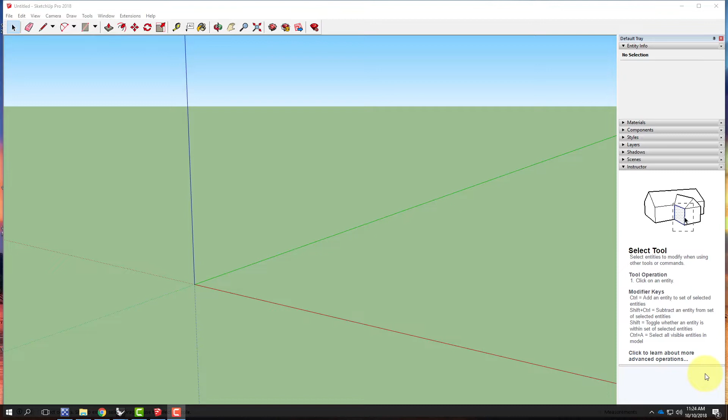Once again, I started out in SketchUp, and I'm going to go to the File menu, then Geolocation, Add Location.

I'll zoom in on Mount Diablo here, say Select Region, and then grab the region. I can confirm it works by going to File, Geolocation, Show Terrain, and that gives me the piece of terrain to work with.

I'll go to File, then Save As. Remember, I have to go back to SketchUp 2013 in order to bring it into Rhino, so I'll save it in that format and put it into today's folder. This is Mount Diablo.

At this point, I'm going to move over into Rhino and open this up. I'm going to go to New and use Large Object Inches as my template. I want to make sure the templates match up and that I'm using inches, because the file I'm getting from SketchUp is also in inches, so the units will match, which is important.

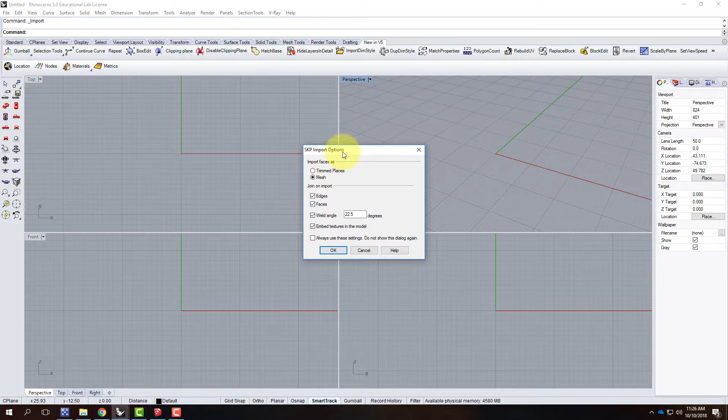So I have my new Rhino file. Inside Rhino, I'll go to the File menu and say Import, and bring in that file I just saved. There's Mount Diablo, we'll bring that in. Default options for the SketchUp import are fine, we'll say OK, and there it is.

Zooming out in the perspective view, there's that piece of terrain I brought in. Remember, this is a mesh, not a NURBS surface, so we're going to convert this into a NURBS surface.

Let me clean up my layer structure first. We can get rid of the flat plane, we don't need that. This we'll put on a brand new layer called SketchUp. I'll right-click and say Change Object Layer. All the rest of these layers can go away, so we'll delete those, leaving just the SketchUp layer and the default layer for now.

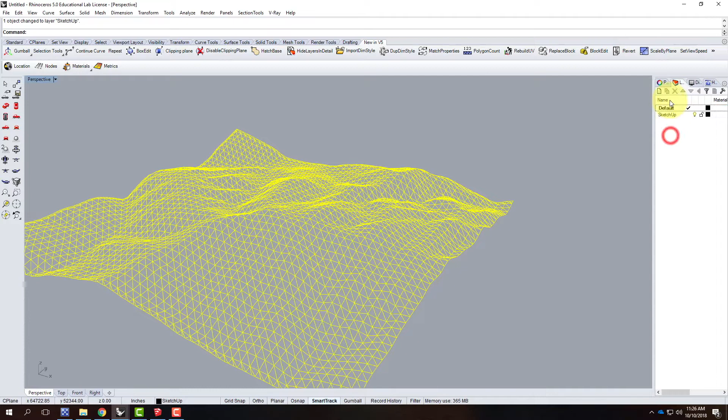Let's view this in shaded mode so we can see that it's a surface. Yep, there it is. I'm going to create a new layer called Contour X and make that the active layer.

I'm now going to use the contour command to make a bunch of parallel lines across this surface. I'll go to Curve, Curve from Objects, Contour, or alternatively just type Contour. My contour base point needs to be one of the corners. Since I have trouble selecting it, I'll turn on Object Snap and Vertex Snap to get to one of the corners. There it is. I want to make sure I go off in space without snapping to anything, so I'll turn Ortho on and go off in the negative X direction, though the direction doesn't make a difference.

The distance between the contours I'm going to set at 100 feet, and I'll press Enter. There that is.

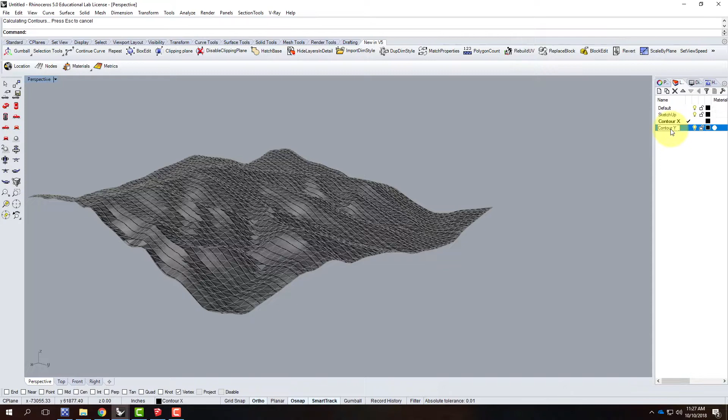I'll deselect everything and repeat the contours, this time on a layer called Contour Y, which I'll make the active layer. Again, I'm going to contour the mesh, not the curves, since contouring the curves would just give me points, which I don't want. So we'll go to Curve, Curve from Objects, Contour, using that same corner as the base point, going off in the negative y direction, again at 100 feet.

And there's my next set of contours. At this point, I can turn off my SketchUp mesh, and I'm left with just the curves that will represent this surface.

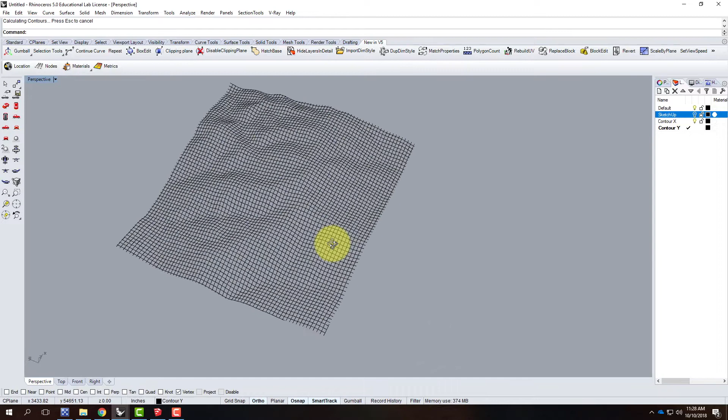From here, I'm going to switch over into the top view, zoom out, and trim off the ragged edges. So let me take a few of these curves, and we'll go to trim.

And there we go, so I don't have any ragged edges around. That's good. Now I can go ahead and make my curve network out of this.

I'll move back into the perspective view and select all of my curves. Actually, let me make a new layer first, and we'll call this terrain. I'll make that active, and then I'll go into my surface curve network.

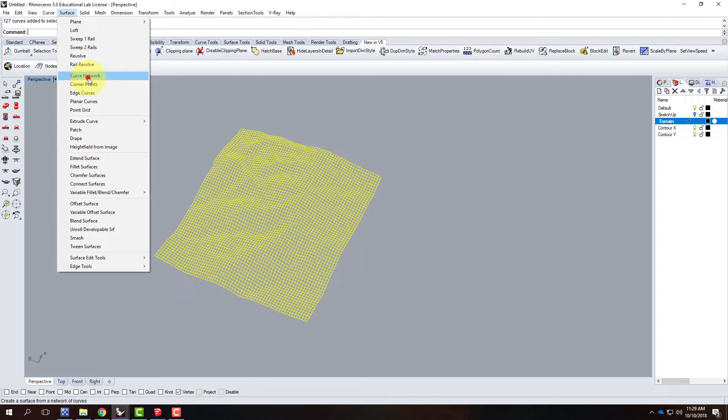Or I could type in NetworkSrf, which is the command line for it. If I did this correctly, I'll get A, B, C, and D on the four corners, or on the four sides of this. The default options are just fine, and I'll go ahead and say OK.

This does take a few minutes, or it can take a few minutes, so we'll be patient while it's working on it. It frequently looks like it's going to crash, so that's not a problem.

While it's there, I'm going to go ahead and flip over and bring up the little cheat sheet that you guys all have in front of you, just so that I have an example of it in front of me.

Actually, you know what? Let me open it in Photoshop. Hopefully I still have it on my flash drive from last class.

Bear with me for just a second while we get this.

Oh, it doesn't look like I saved it. Well, we'll have to look at it not in Photoshop, we'll have to look at it online. So sorry about that. Let's open this back up and go to today's exercise.

And apparently I have to go to—there we go. There's the table. So we'll come back to this table in just a second. Let's see how Rhino is doing for us.

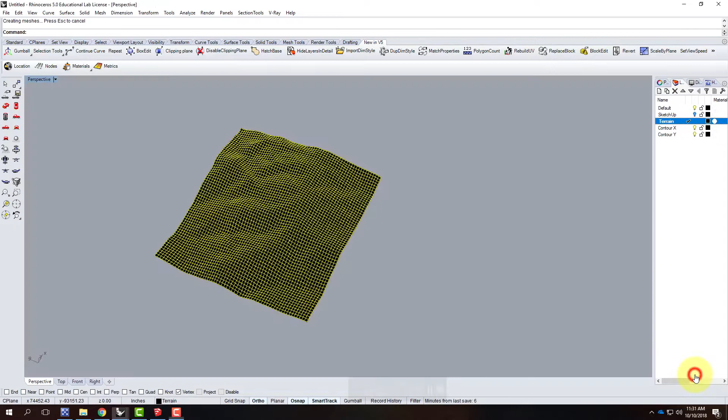All right, so it did finish. That's good. Now that it's finished the surface, remember it's going to be super dense, so I'm going to have to rebuild the surface. I'll click off so that nothing's selected, and this process takes a while. It's very slow. Then I'll click on the surface itself and wait.

It highlights that big block of yellow. At that point, I can type rebuild, or I can go to the edit menu and select rebuild, and I'll wait. By the way, it's faster if you have just one view showing instead of all four when you try to select it.

When I do the rebuild, I'm going to do it at 100 by 100, and I'll go ahead and say OK.

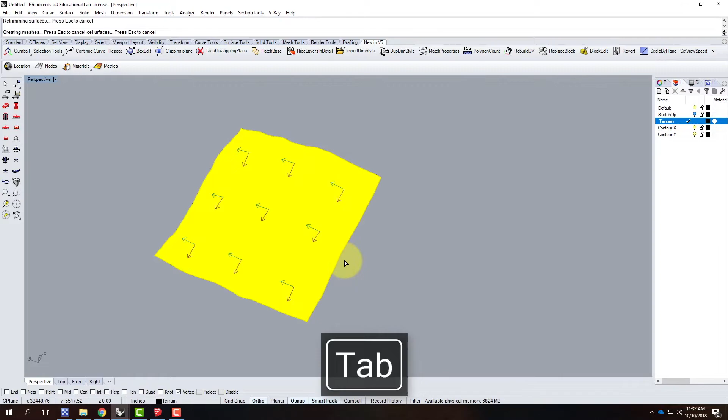Much better. Now I can actually work with the surface itself. I'll turn off my contour X and contour Y, and now I'm left with the surface itself. Let me zoom selected so that it's easy to see. And there it is.

So that concluded the first day. That was 211, now I'm moving on to 212. So 211, I managed to do it in all of 9 minutes and 30 seconds, and that was the first day. So you see how this compresses down. The next day I can compress that down too, and we'll get to the last day.

Like I said, all in all, I think it would probably take me about an hour to go from the SketchUp all the way through laser cutting and having it built. Maybe an hour and a half. So the process gets a lot faster as you work through it.

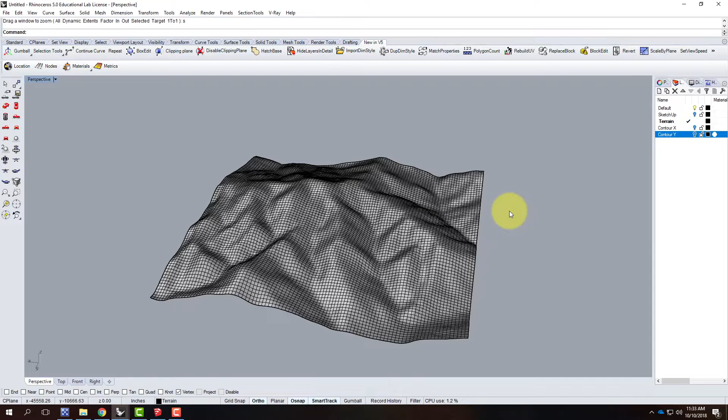So now I have my terrain. Now I need to go back and double check that little chart that I brought up here. And I needed to select, number one, what the drawing scale is, or what the model scale ultimately is going to be. And last time we did 1 to 250, which worked out okay for the size of our terrain.

If you were working on a specific site, you'd probably be down here in the architectural side of things. You could pick one of those scales—the same strategy applies. My guess is we're going to work somewhere for this class between 1 to 500 and 1 to 200. I think almost everybody that I went around and helped last class was at the 1 to 250, the same example that I was working with.

At 1 to 250 scale, if I wanted my model to be 11 inches by 17 inches, I would get an overall size in inches of 4,250 inches by 2,750 inches. So I need to go back to my Rhino model and draw a rectangle that is 4,250 inches by 2,750 inches.

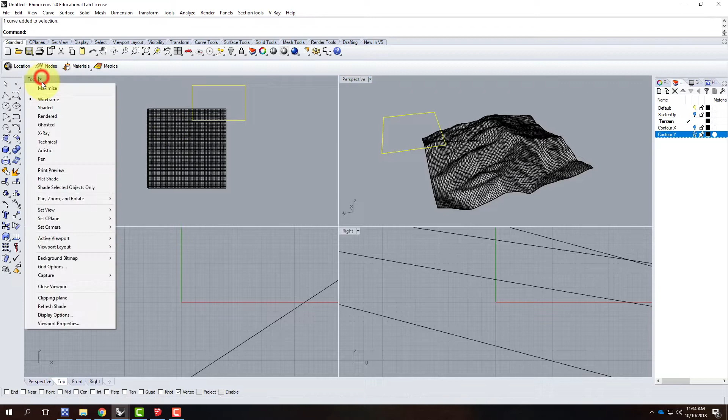I'll hit enter to finish, and there's my rectangle. Obviously that rectangle is hanging over the side of my terrain a little bit, so I want to move it. I'll go back into shaded mode so I can see this. Some people like rendered mode because you can see the terrain more and discern where you want your rectangle to fall. Let's say it's right about there.

At this point, I need my rectangle not to be flat, but to follow along with the surface so I can use it as a trim. In the top view, I'll use the project command. I'll select my rectangle as my curve, press enter, then select the surface to project onto and hit enter. Once I've done that, it nicely follows along with my surface. Now I can use that curve as a trim.

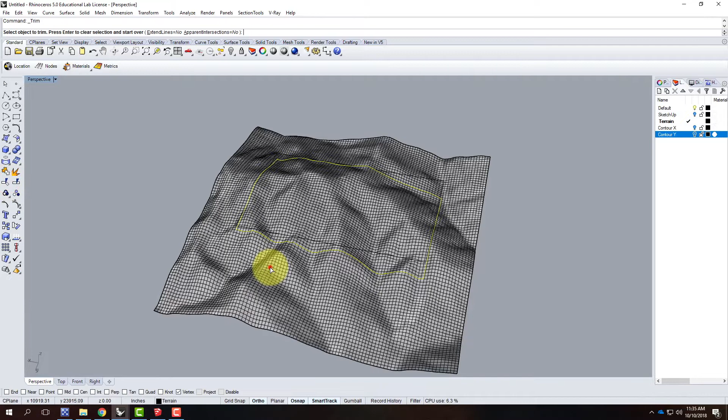I'll click on the trim button and get rid of the rest of that surface. I'll hit enter to finish. Now the piece of terrain I have left is at 1 to 250 scale, 11 by 17 inches. That's perfect, that's what I wanted to have happen, and I have the terrain ready.

Now I need to think about slicing this terrain up as if it were slices of cardboard. So I need to know what the thickness of my material in the final model is going to be in order to actually create this.

I'll go back to that chart I had, right here, and depending on the material I'm going to pick one of these columns. For our purposes, the cardboard is a little thicker than 1/8 of an inch, so it's 5/32. I'll find out what my contour interval is going to be. It's 39.063 inches, and that represents the thickness of the cardboard in my final model. So I'll use that number, 39.063, when I cut this next round of contours.

I'll add another layer and call it Contour Z, or Topo Lines, or anything like that. I'll make it active, go up to my Curve menu, Curve from Objects, Contour. Select objects for contours - it's that surface. I'll press enter. Contour base point - we'll pick one of the corners. It's no longer snapping to the corners because it's not a mesh, so we can turn on Endpoint Snap instead.

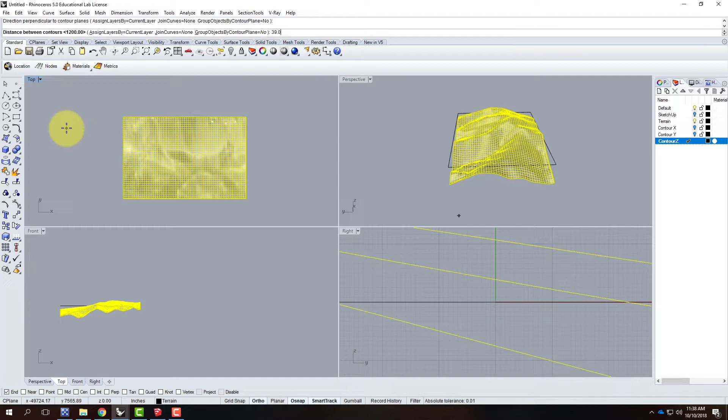I'll start at one of the corners, and I need to go straight up and down, but it's not letting me do it in this view. So I'll move myself into one of the side views here, and there we go, making sure I can go straight up and down. There it is. Now the distance between the contours - this is that value I got from the chart, 39.063. I'll type in 39.063 inches and press enter.

And it will then slice up my piece of terrain quite nicely. Remember, each of those contours is the thickness of the cardboard of the final model - that's how I determined what these contours are going to be. To confirm they were done correctly, I can look in one of the side views and make sure they're perfectly horizontal lines, which they are. I could also look in this other side view and see they're perfectly horizontal lines, so that's what I'm looking for.

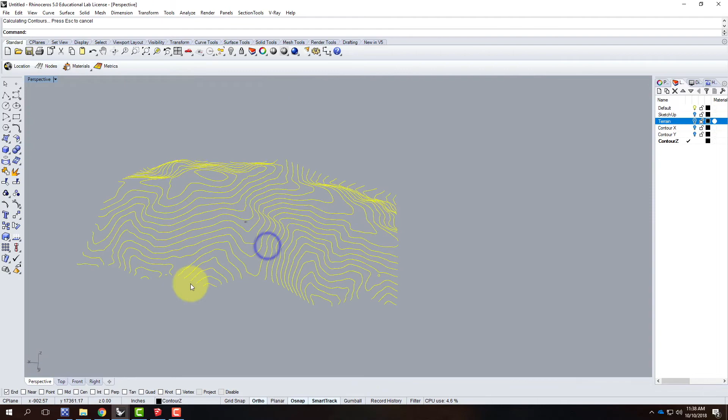At this point we can turn off the terrain altogether and look at our curves here. Now we were going to draw the steps on the sides, and I showed you there were two different methods for drawing the steps. I'll go through both of those methods again today. The first was to install a bunch of points along the edge here.

To do that, I went into the points, and instead of doing a single point, I'm going to right-click on the button instead of left-click, which will let me do multiple points. I should also create a new layer for this.

Put it down here at the bottom, and let me rename that points. Or let's go side 1. There we go, that's the current layer.

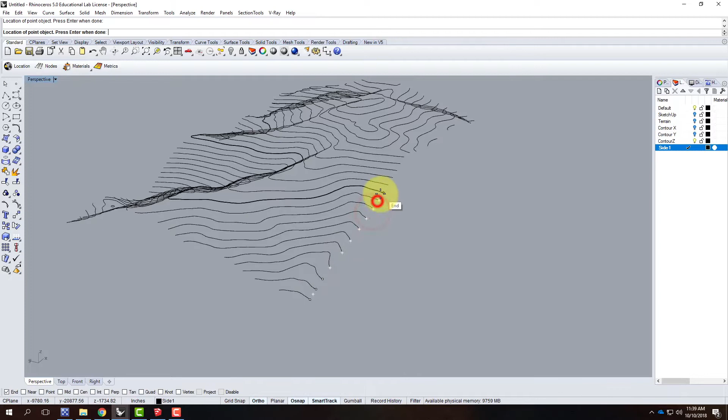I'll right-click on the points here so I can start working on my points all the way up the side. I'll click one on each end. I only have end snap turned on, definitely not near snap, because that would get me messed up. I'll work my way along all of the end points like that, and press enter when I'm done.

Now conveniently, these are all on a layer, so all I have to do is right-click on the layer and say select objects, and there's all my points. If they weren't, I could use the command selpt, for select point, to get those points. That's another way of doing it.

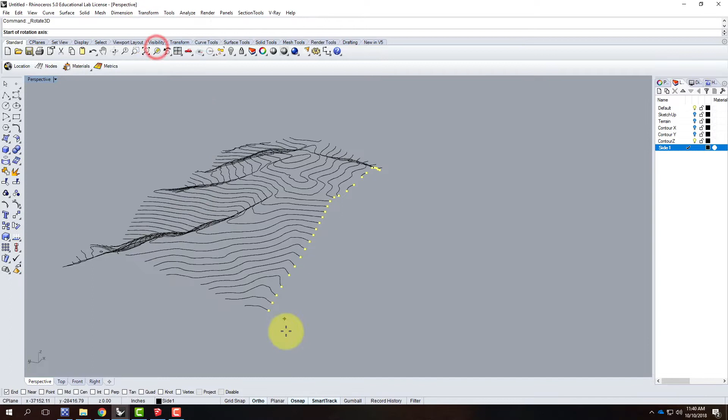Now I need to rotate them to be flat, so I'll use Rotate 3D. I'll go up to Transform, Rotate 3D, start at the first point in the line here. Again, we'll go off in space - this is going along the x-axis right there. And we'll go from straight up and down and fold it down to the side.

At this point I can go ahead and draw the steps, so I'll start with my Polyline tool, starting on the first point. I do need to turn on point snap here - there it is - and I'm going to turn on perpendicular.

I'll come over and use my smart tracking, hovering on the first point, coming back until I get perpendicular. Oops, helps if I actually snap there. Hover, snap back to perpendicular. Hover, snap back to perpendicular.

And I'll work my way up this side. When I get to the top of a hill, I go straight across, and then I start working my way back down the other side. So here I get to the bottom of a valley. At that point, I need to go down my distance of my contour, so 39.063 feet.

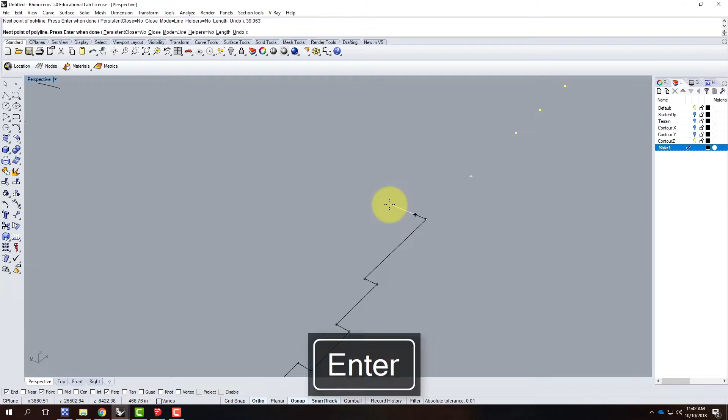Over, and back up - that's the top of a hill. This is now the bottom of the hill, 39.063, or the bottom of a valley. We'll go over, we'll go across, and then we can start our steps going down the other side.

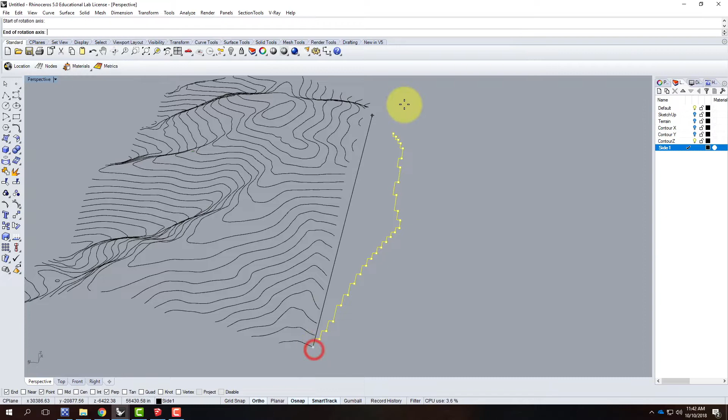All right, once I'm done, I can select my steps and all the points and rotate 3D back. So I'll go to Transform, Rotate 3D, go off in the X direction again, and take it from flat and move it up to be vertical. If I did it correctly, all the steps should line up, which they do. And if I looked at this in one of the side views, all of my vertical steps are in fact vertical, which is good.

So the alternative method to that - there's nothing wrong with that method, but it can take a little bit of time - is to work with what's called our CPlane, our drawing plane. I'm going to adjust the CPlane, so rather than being in the X and Y direction, rather than being flat, I'll adjust it so it's vertical along this edge. I'll do that by clicking on the triangle next to where it says perspective in my viewport, and go to Set CPlane, 3 points.

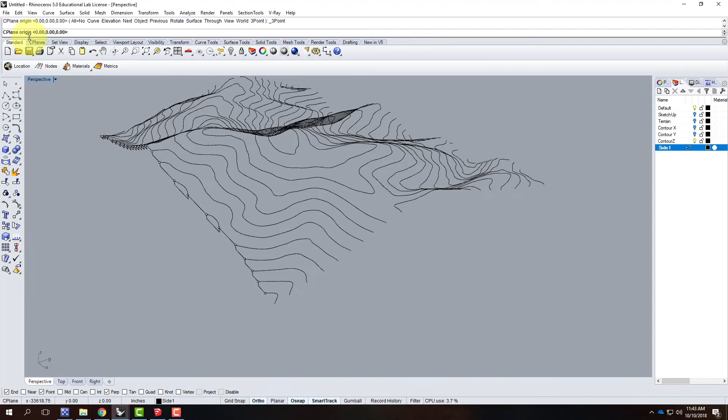CPlane origin is going to be the first point in this row here - although I don't know for sure that that's actually in the corner, so it may be this point - so I'll do the second point there. I'm going to make sure I'm going off into space along axis, there it is. Then I'll switch my view so I'm going straight up and down, like that. If I did it correctly, I should see my little grid showing up right there, and it should look like it's in plane with what I'm creating, which it is.

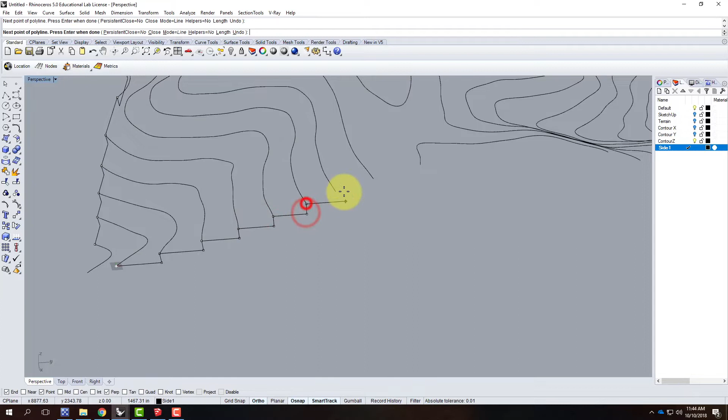At that point I can go ahead and start at this first point and move my way, snapping to perpendicular and creating these stair steps as they go up this side. So this saves the rotation, and you're drawing right in plane with all of your objects. I'm at the top of the hill, I go straight across, and I continue going back down the other side.

All right, so I've got that side done. I need to switch over to do this side. I'll go back to my set CPlane, and go back to world top, which resets it to the original CPlane.

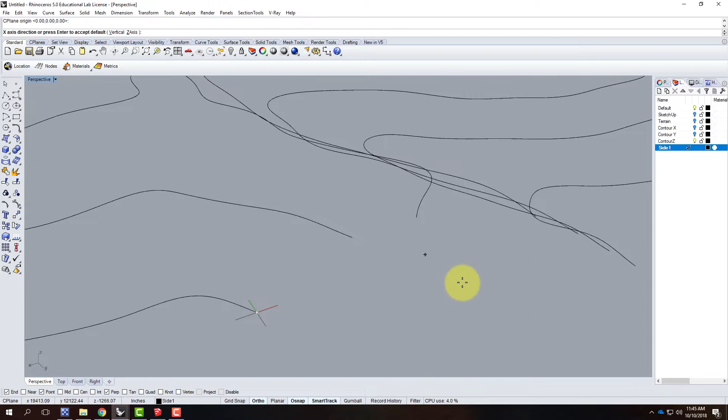Then I'll go to set CPlane 3 points. I'll start at this point this time, going off in space along the x-axis. Then we need to go vertical, so I'll switch views. My little grid shows up right there.

I can start right from that point, go up, across, and then back down. This front side has a lot of undulations in it, so I'm going to be going up and down fairly frequently.

Now there will be some times where you guys made a mistake, so I'm going to deliberately make one here. This should go down the thickness of a contour, but I didn't do it, so I'll go straight across and keep going. I'll show you how I would come back and fix that later on.

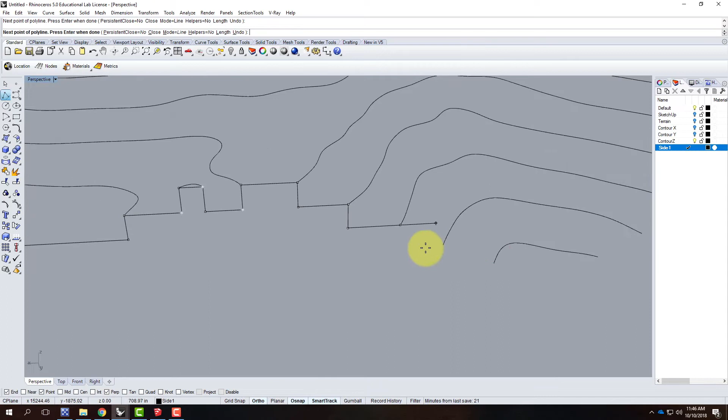I'm going to go down 39.063 feet, and then we'll go back up this side.

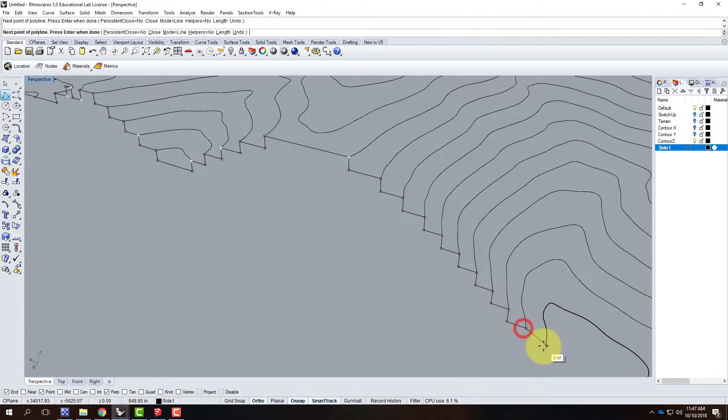Sorry, I know this gets tedious watching me do it, but I have to do it so that I can get done with this so we can move on. So 39.063 feet, we'll go across like that, and I'll work my way back up this side.

Straight across because I'm at the top of the hill, and I'll end right there. OK, one more side to go.

I'm going to do that CPlane one more time. So I'll go back to my triangle, go to Set CPlane, World Top, then back to my triangle, Set CPlane 3 points.

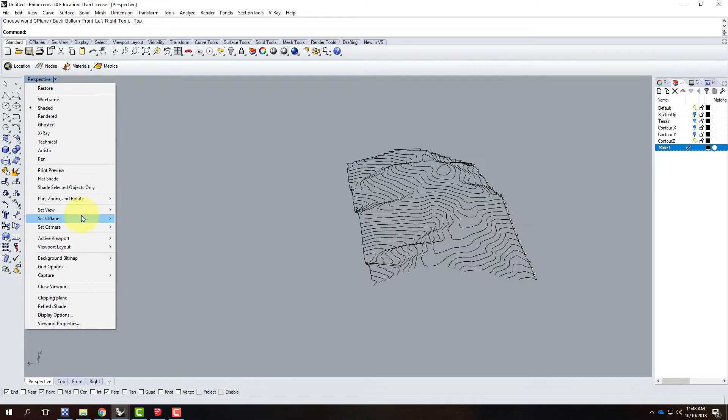And we'll go off. There we go, and we'll go up vertical. Then I need to do one more round of stairs, so we'll work our way up this side.

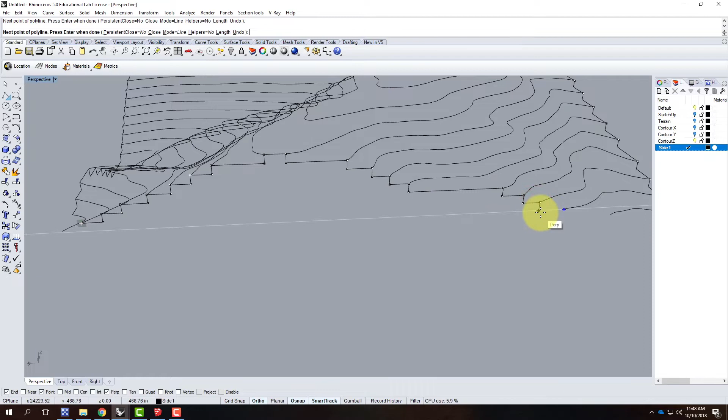All right, so at this point I have all the sides complete. But just like you did, I left the ends of the sides, or the corners of the sides, incomplete. So this just got me to the end of last class. We did the first class in 8 or 9 minutes or whatever it was. This one took a little bit longer, about 15 to 20 minutes for me to do. So now it's time to move on and continue from where we left off.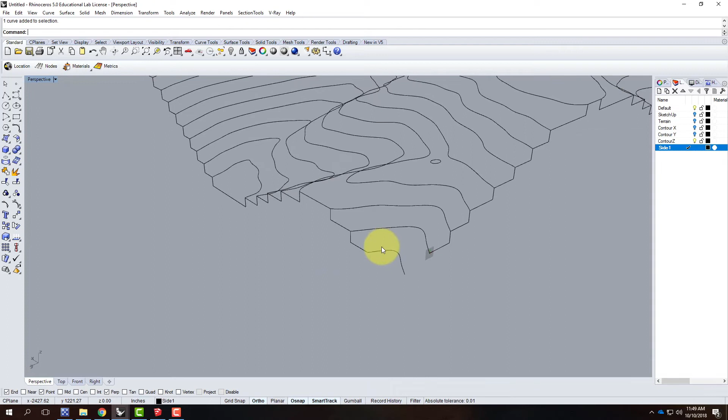The first thing I want to talk through right now is how do we make these corners actually work? The reason I left the corners blank for now was because we need to reconsider what's happening in the corners. So at this example here, this is the last contour on this side.

I should go down, over, and back up to that point. Likewise, this should come down and over. I don't know for sure, though, looking at this, that this point is exactly in the corner. It might be, but it might not be.

So what I'm going to do as I get closer is start with this, and I'll go down 39.063 feet, because we know I need to go down. Then I'll go off in space, and you can see right there that it doesn't actually match up. It passes by that edge.

So if I had gone down and then over, my step would be out of plane. So I just go down and then leave it long. On this side, I'll go down 39.063 feet.

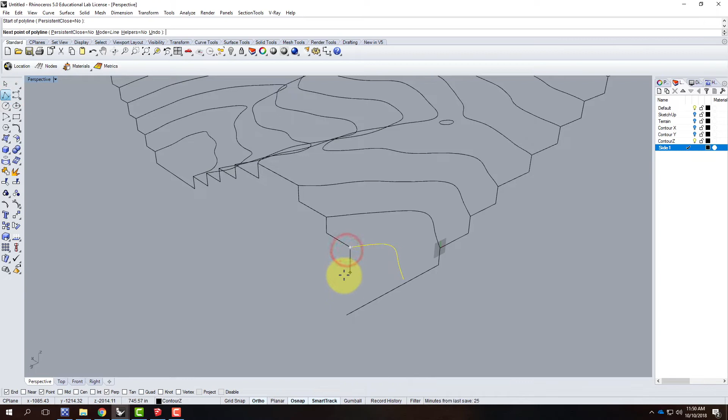Now I can't draw this direction anymore because my CPlane is over here, so I'll have to use some snaps and see if I can get it to work. There it is, and we'll go back up. Then I'll leave this one long, and I can basically come over and snap to perpendicular.

So that's how the corner came together here, but it's going to vary on each corner. So I'll use this as a trim, and I'll trim off that piece there. So this piece and that piece should be joined together.

So I'll go ahead and type join. Likewise, this piece and that piece should be joined together, and I'll type join. So that corner was done correctly now.

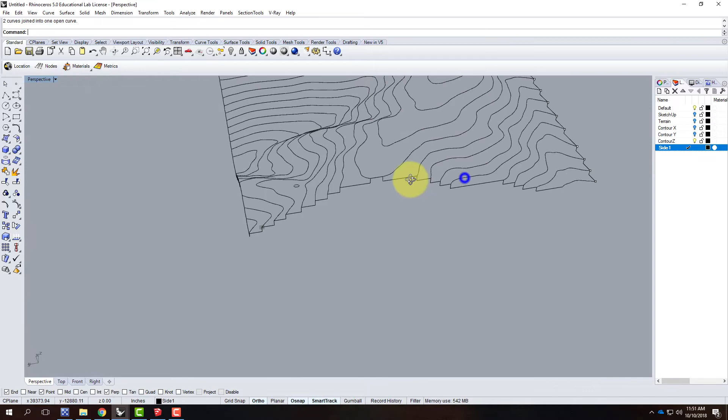I'll work my way along, and this is also one of the things that I do is I go along and check to make sure all of my steps look like they match up as I move from one side to the other. OK, so now at this point, from here, we need to go down 39.063 feet.

And we need to go off in space that direction. Likewise, from this point, we need to go down 39.063 feet, like that. Now I'm betting that those actually, on this one, ended up right on top of each other. It happens, so let's see. I'll use a trim and see if I can trim that off.

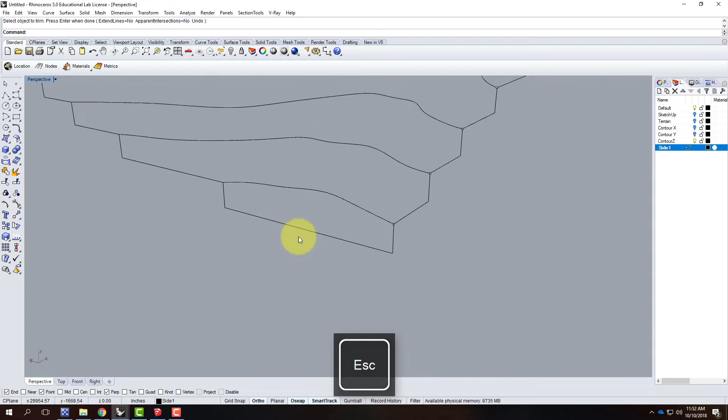There it is, and that did work that way. So in this case, this curve here ties into that curve, and this curve and that curve tie together. So I'll type join and work my way along this side.

All of that looks pretty good. This goes down and back up. Truth be told, along this, these little tiny curves, these little scoops, are going to get lost and burned up in the laser cutter, so they're not that useful, but I'll leave them for right now.

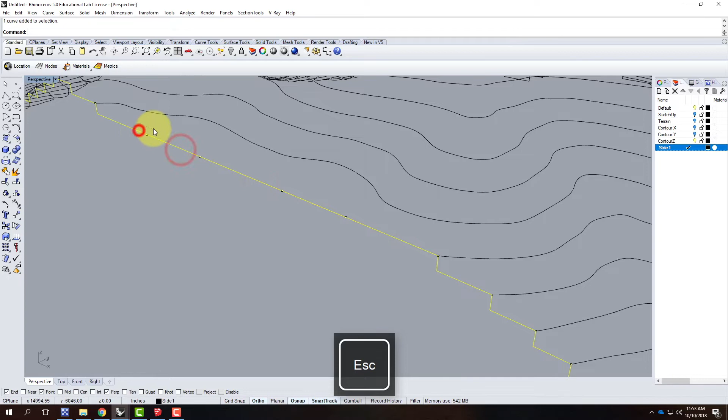Sometimes if you have ones like that and you want to just skip it and go all the way across, I'm okay with that. Essentially all I would do is delete this, then draw a line from here to here, and another line from here to there. Then I need to do some trimming. I'd type trim, get rid of that and that, and then take these segments here and join them back together.

So if you end up with some really funny little piece along the way, you can feel free to delete it. A piece like this is plenty big enough to glue in.

Okay, so let me adjust this corner now. We'll come back, I'll go down by 39.063 feet. There it is. And I can't seem to go off from here because my CPlane isn't in the correct direction anymore, so we'll just leave it. I'll come back to this one and go down 39.063 feet.

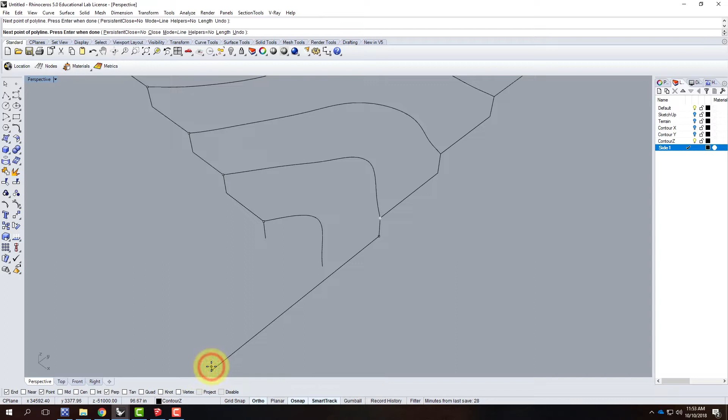And now I'll go off with that point. This then would connect perpendicular to there. I could go from this corner down 39.063 feet and snap to that point there.

So there's that corner. I'll go ahead and type trim. Oops, sorry, let's try trim one more time. Trim, there we go.

And now I need to join these up, so I'll hold down Shift, select those, and then Edit, Join, or I can type join. Same thing, this piece and that need to join together as well. So this, I'm checking along the way. That all looks pretty good. I get to my last corner here.

And so I could start right here. This would go down 39.063 feet. But I can't go off in this direction just yet, so I'll just finish it there. I'll start at this point and go down 39.063 feet, and this one I can go off in that direction.

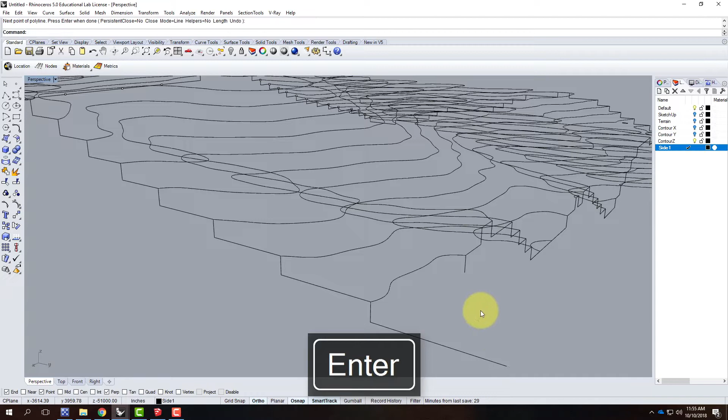And now that I have that curve, I can snap from this perpendicular to there to create that piece of the curve. We'll use this as a trim for that corner there. This joins to this, and this and that join together as well.

So as I was creating this, I told you I was going to make a mistake on purpose. I didn't go down here, I went straight across. So this is one of those places where I'm going to have to fix it.

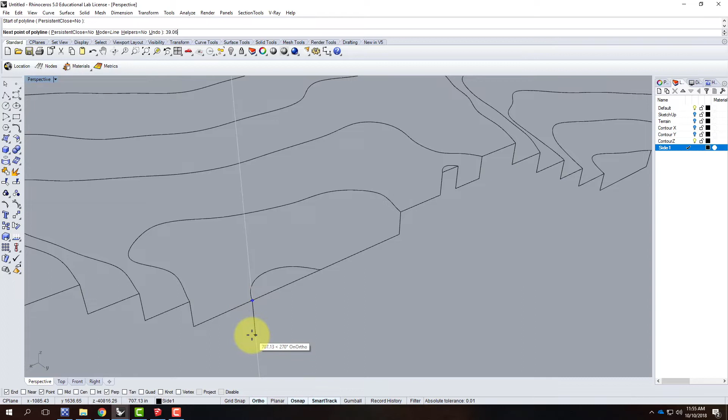So once again, I could go to my Polyline tool. I'll go down 39.063 feet. I can't go over just yet, so I'll finish the command and press enter. I'll go back to my Polyline tool, and I'll go down once again 39.063 feet. And now I could snap those two pieces together.

I could even join those pieces together. Join. I could use this as a trim to trim that piece out, and then I could select this piece and join those back together.

Sometimes you have a piece where you kind of messed up a little bit. Trying to help you guys solve problems. Sometimes you have something like that happened. I made a mistake, but it's all joined together. How do I fix it?

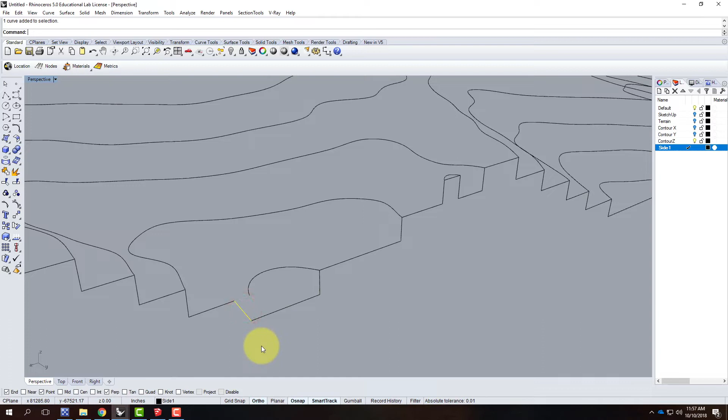In that case, the strategy would be to explode. So I can go up to Edit, Explode, or just type Explode. Deselect, I'll hold down Control, deselect that piece while everything else is still selected. While they're all still selected, go back and join, go to Edit, and then Join. That keeps this and this still connected together, but gives you access to that one piece, which you can then delete. I can then go through and fix that problem there and join those back together. So the strategy there was just to explode, then select the piece that you don't want, and delete that piece.

Okay, so now I have all the sides all the way around my object. At this point, I have to make these sides into pieces that can be cut out on the laser cutter, and so I'm going to construct the sides.

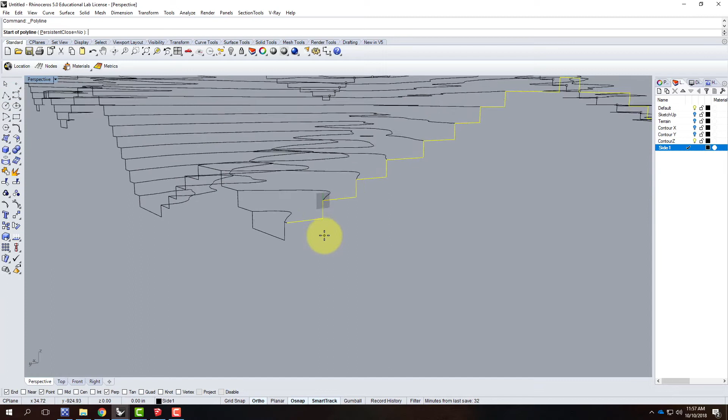I'll start with this side here. Basically, a piece of cardboard that goes down further than whatever my lowest point would be. So let me start right here with my Polyline tool. I'm still in Ortho from earlier today. I'll start on that corner. I need to go down, making sure I'm lower than whatever the lowest point is. My lowest point is right there, so I just need to make sure I'm below it. It doesn't matter how far down it is.

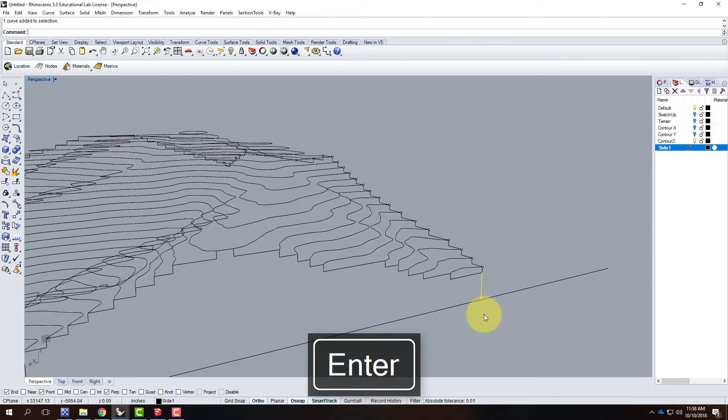We'll put it down there, that's fine. Now I can come across and just leave it long. Then I can come to the other end, right there. I can go down and snap to perpendicular to create this side. I can then use a trim and get rid of that. So that piece plus this piece all end up being one side. Let me go ahead and join those together. There's my first side.

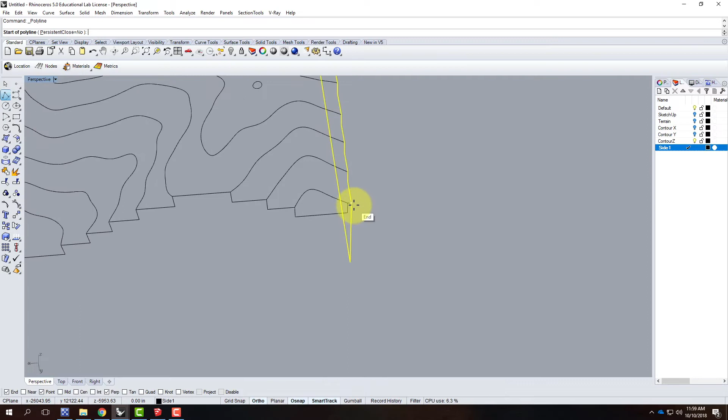I'm going to repeat the process on this side. I'll go back to my Polyline tool, come down, match up with the bottom. In this case, I can't draw this way, so before I did it, I really should have reset my CPlane. Let me go back to set CPlane, world top. I can come down and snap to that point, go off in this direction longer than my model, then snap from here down perpendicular. Use that as a trim. And there we go - those two plus this piece become that side.

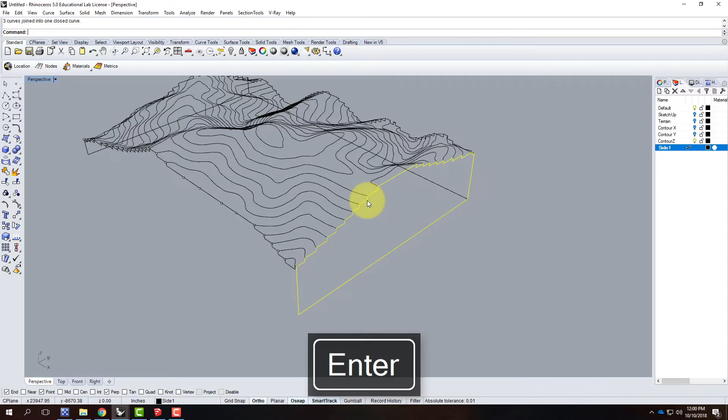We'll do this side now. Once again, I'll start with my Polyline. I'll start here, come down to that point, make it a little long. I'll start at this corner, come down and meet it perpendicular, and we'll trim that piece off. Then I'll select, hold down Shift, select all of those, and type Join. Notice each one of these is a joined polyline, each side.

So last side, right over here - we'll go down, snap. We'll go to right there, snap. And we'll come right back up to there, like that. This plus this, joined, becomes that side of my model.

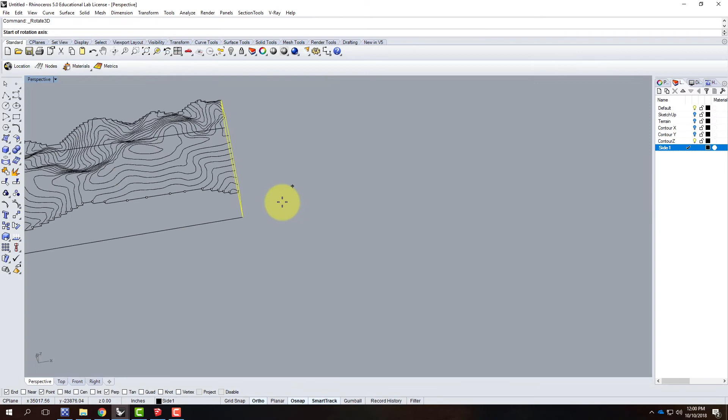Now that I have those sides of my model, it's time to do a Rotate 3D and fold them down flat. On each side, I'm going to go to my Transform, Rotate 3D. My axis of rotation is going to be this bottom, and we're going to fold that one flat. The important thing here is that all of them have to fold the same direction - I either fold them all out or I fold them all in, but they all have to be the same. So we'll go ahead and fold this one out, move over and fold this one out, and then fold the last one out here. This is just a repeat of the Rotate 3D command every time.

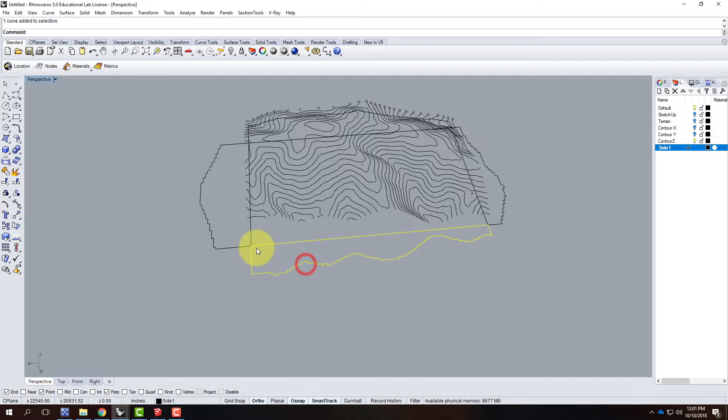So these pieces now represent the sides of my model, the stepping sides of my model. That's good, I have those pieces. Unfortunately, these curves here are still all moved up and down in the Z direction. I need a flat version so I can cut them out. We've done this before - I'm going to create a new layer just so I don't get these confused, and we'll call this Projected.

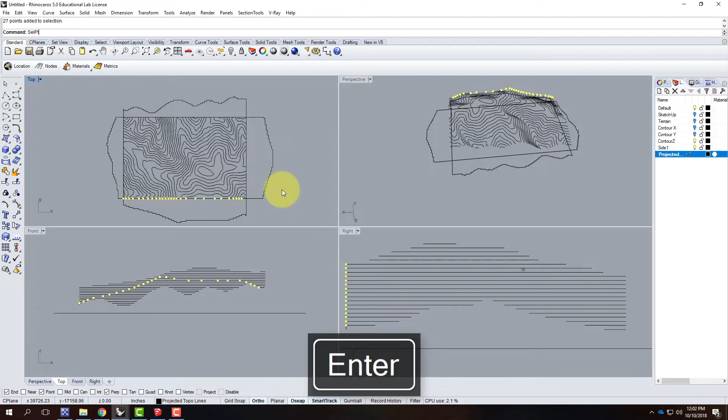I'll call them Projected Topo Lines. We'll make that active. We're going to move into the top view so we can look down on our object. Those are all the lines. I actually don't need the points anymore - SELPT to get rid of the points, and then I'll press the Delete key.

On this Projected layer, I need a surface that is larger than my terrain - there it is. I'm going to do this in wireframe right now. Then I need to select all of those curves - there they are. I need to Project, select surfaces to project onto - that big surface there. I'll hit Enter.

Remember, I did all of that in the top view, and now I have a perfectly flat set of curves. So at this point, I can turn off side one, turn off contour Z, and go ahead and delete this plane. So I'm left with the sides and all of the contours nice and flat.

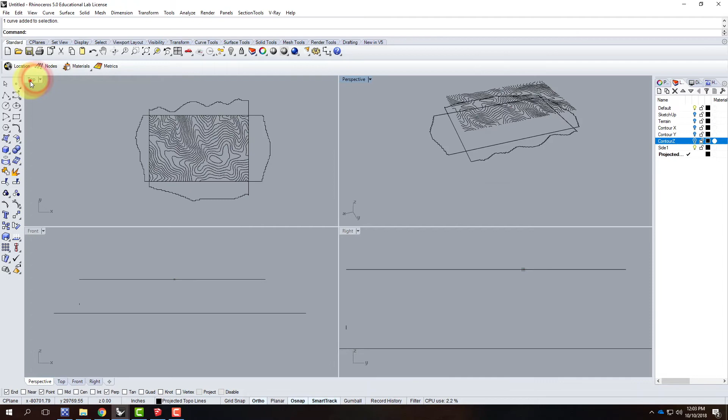So it's time to start prepping the laser cut file to actually go over and cut these guys out. I'm going to switch now from the perspective view into the top view because I don't need stuff in 3D anymore.

At this point, you have a choice. You can keep working at full scale, or you can scale it down to the size you're going to be cutting long term. You will have to scale it eventually. For me, I like to go ahead and get it down to the size I'll be laser cutting at this point. It's optional though—you can do it later if you want, you just have to do a little more math in your head.

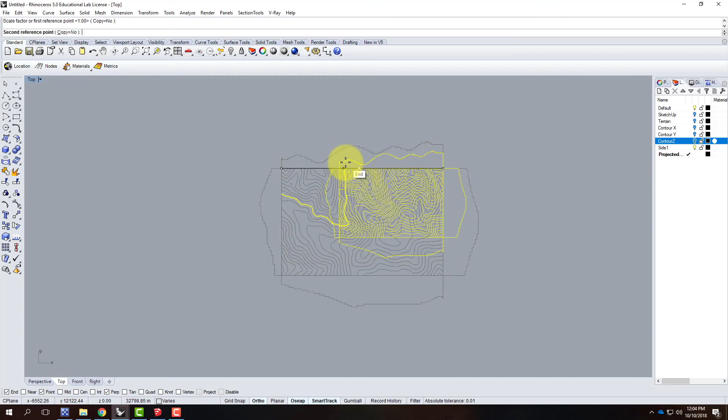So I'm going to take all of this and scale it. I'll snap along one of these sides, going from here to there. I know that distance is ultimately going to be 17 inches, so I can type in 17 inches and press enter, and everything disappears.

And you go, oh no! No, you didn't—you just went from 4,000 feet to 17 inches. So your computer's not showing that because I haven't deselected anything. You type Z for zoom, followed by S for selected, and there it is. It's just now 17 inches, not 4,000 feet.

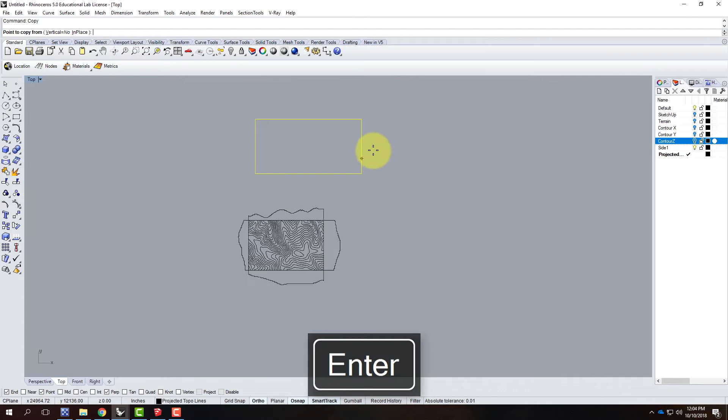OK, so now we can start setting this up for laser cutting. Let me give myself a couple laser bed sizes—I'll say this one is 24 inches by 12 inches, that would be the laser cutter bed. I'll go ahead and copy this two more times. It may take you 3 or 4 beds to lay these out.

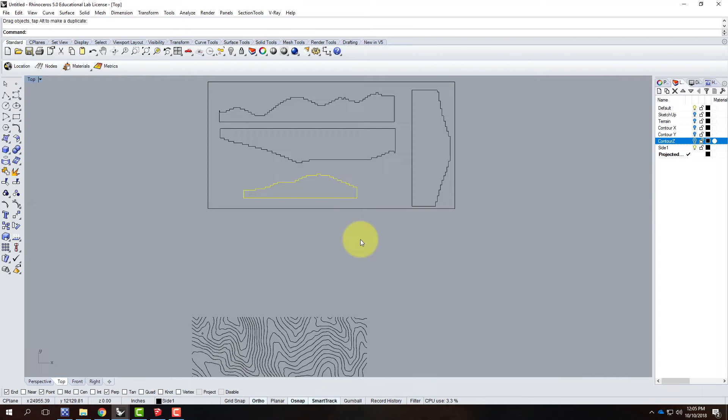The first one, for example, I could move these pieces up so that I could cut those out. I can move this piece and rotate it as long as I don't flip the piece. So I can rotate so that it actually fits, and move that there as well. There's no harm in rotating—just make sure you don't flip. That's key. So those pieces are going to be OK.

At this point, I probably need a layer called laser cut. Let's put it down at the bottom here—there's the laser cut layer. I'll make a sublayer for cut and a sublayer for engrave.

The cut layer is going to be red in color, so I'll click the black square next to cut and change it to red. The good news about Rhino is this is the actual red you need to laser cut, so you don't have to make any changes later on as long as you pick the one that says red. My engrave is blue—I'll click the black square, choose the one that says blue, and say OK.

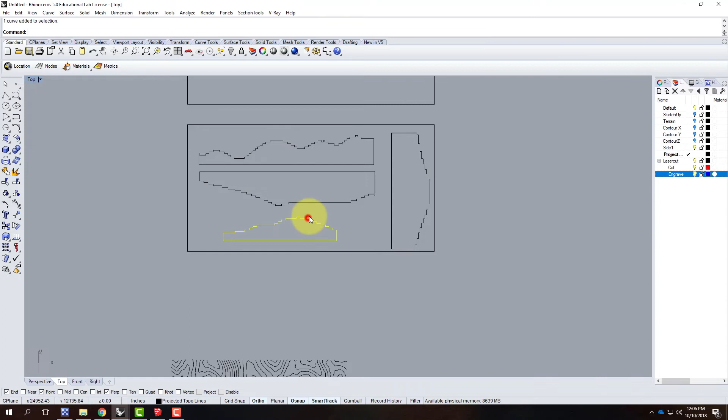So each of these pieces is going to be cut out, so I can take all of them and put them on the cut layer. I'll right click and say change object layer. They should now be all red.

In terms of laser cutting, most of you have laser cut before, so I'm not overly worried—you guys kind of know the process. Stay away from the very edges, don't put your objects right on the very edges, it's going to be problematic when you go to cut it out. So make sure there's a little bit of a border around the objects.

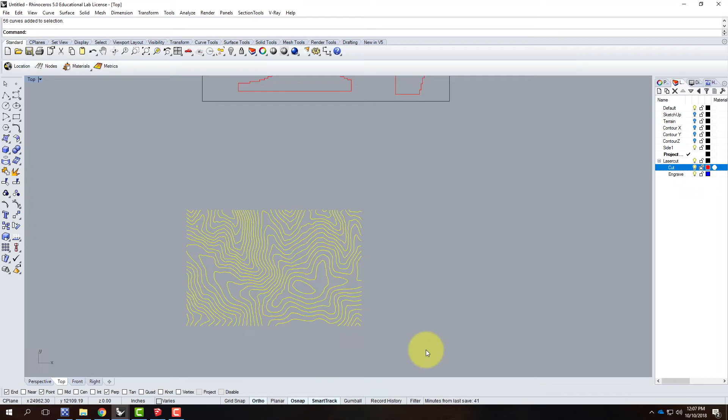OK, so now we get to the topo lines. If I took all of these topo lines and cut them out one by one, they wouldn't stack on top of each other anymore, correct? So what I need to do is take this, and the first time, do every other line. Then I'll make a second copy of it and do the opposite. I'll start with whatever the lowest point is—this can be a little tricky.

Let me move this first up onto one of these laser beds, like that. I'm going to start where I think a low point would be—we can start with this. I'll take this first one, hold down Shift, and skip to every other line as I'm making my selection, working my way up the hill. OK, so I got to that point. Now over here, this is going down, so I need to select every other curve like that. We'll come here, and we'll keep going there. That's good.

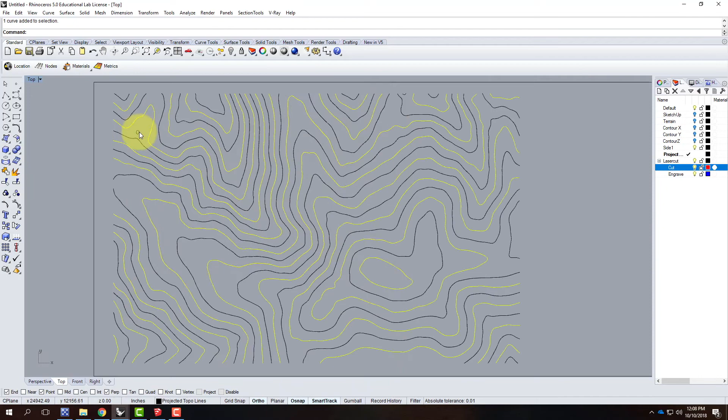OK, so on mine, there's a few tricky ones. I've got this circle that's floating there. It could be on either layer, I just have to be consistent. Oops, sorry, I'm thinking I'm in Illustrator. I press spacebar to move.

Then up here we've got this curve, and another little bitty curve. This one here could belong to either side. This curve and this curve might be the same curve, or they might not be. This could connect to that curve, in which case this should be selected and that shouldn't.

So it's a little awkward as you look through. Sometimes you'll have to go back and reference your original surface where your sides are to see whether it's going up or going down. So in that case, I could come over here, this side here - I show a little peak right there. So this and this do match up. I corrected myself there. Do you guys see that? Where it goes up? That means those two curves are the same ones, there and there.

Likewise, on this side, the one in the middle, this is the same height, right there going across. So this one should be selected there as well. Sometimes you just have to look at the sides and make sure they match up correctly. Now that I've done that, I could also double check this one here. Yep, it's that right there, so they should be the same.

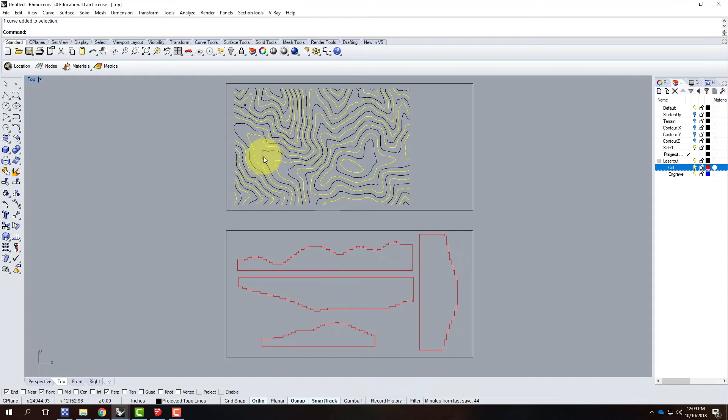OK, perfect, so I have all of those selected. I can take those and put them on the cut layer, so I'll right-click and say Change Object Layer. They're all on the cut layer now. The opposite set, all of these, should be on the Engrave layer or the blue layer.

So I'll take these that are currently black. Oops, sorry about that. And I will change all of those objects to be on the Engrave layer, so we'll go to Change Object Layer. So I end up with this.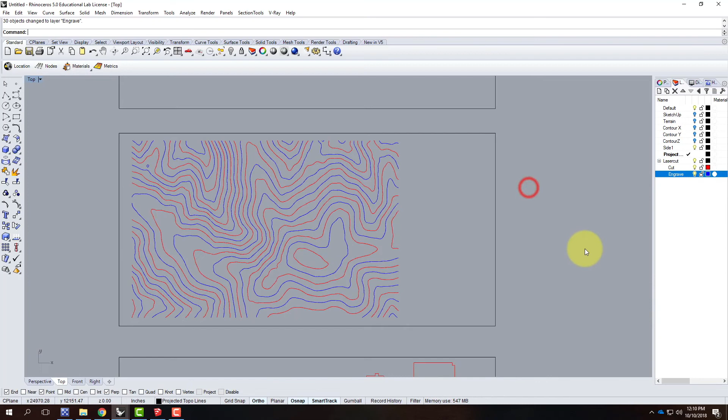I do want to check that little piece right there. Yep, it is, it's the same as this one. OK good, so this first copy, I do need a rectangle that goes all the way around the outside.

So I can use my smart tracking to get the actual corner - there it is. Once again, I'll use my smart tracking on this corner - there's the corner. That going all the way around the outside should be a cut, like that. So I have one set.

Now I need the same thing, but opposite colors, because what I'll end up doing when I make the physical model is I'll have both of them side by side, and I'm going to alternate. I'll pick one piece from the first stack, and one from the second stack, and put them together. It's like shuffling a deck of cards, where you have two sides and you're putting them together. That's how you get the space to glue them.

And I'll bring the models back so you can kind of see it, and I'll also do a demo of it for you as well.

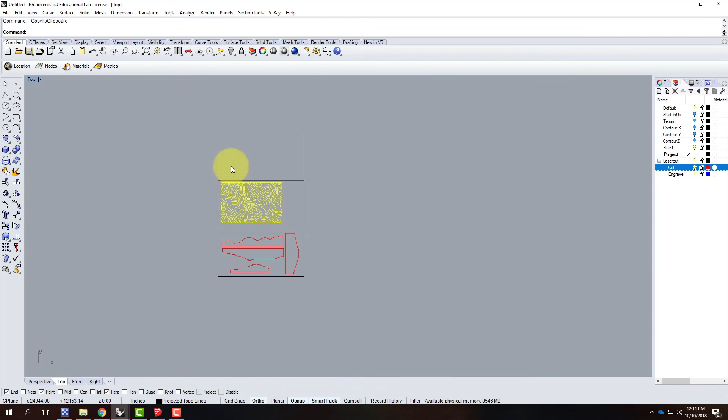So I'll take this whole thing, I'll go to Edit, Copy, and I'll come up here and go to Edit, Paste. Excuse me, I shouldn't have done that - I should have gone to Transform, Copy. There we go, my mistake. Like that. All right, now I need this one to be the exact opposite.

So I'll select all of - let me select all the reds. And I could make my life a little bit easier if I just right-clicked on, say, the Cut layer, say Select Objects. It'll select them all. Then I can hold down Control and deselect over here, which selects all of those.

Those are going to need to move, but I need them to go somewhere else first because I need to be able to distinguish which one's which. So I'll just put them up on the laser cut layer - I'll say Change Object Layer. Then I can select all of the cut layer.

Control, deselect. I'll right-click and say Change Object Layer. Now those are all there. I can go back and select my laser cut layer, which are just these, and move them back down onto the cut layer.

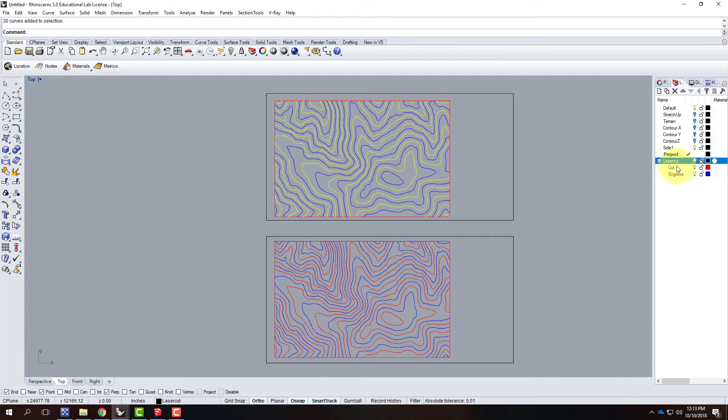Change Object Layer. So these are the exact opposite. If I look for something on this lower one, there it is, it's red. If I come up here, it should be blue. If I look for this piece here, it's red. I come back over here, it should be blue.

I'm a little confused why I keep getting doubles. I think I might have accidentally given myself doubles. Yeah, I did. So let me fix that, I don't need doubles. If I left that, it would give me doubles on the laser cutter, and it would run each cut twice.

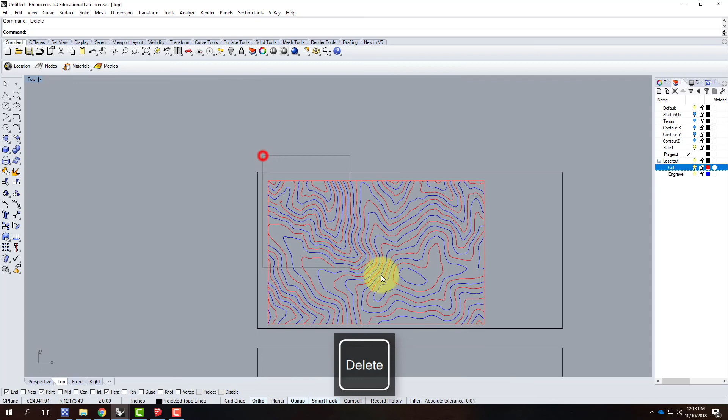Don't want that, so we'll do this whole process of changing it one more time. It's not that bad. I'll select the whole thing, copy. There it is. Let me select the cut layers, select objects. I'm going to deselect there, deselect there, and deselect the border. We'll put that temporarily on the laser cut layer, change object layer.

Then I can select the engrave layer, select objects, deselect those. These ones are going to move onto the cut layer, change object layer. I can come back and select my laser cut, select objects, and those are going to move down to the engrave layer, change object layer, and now they're in the engrave layer.

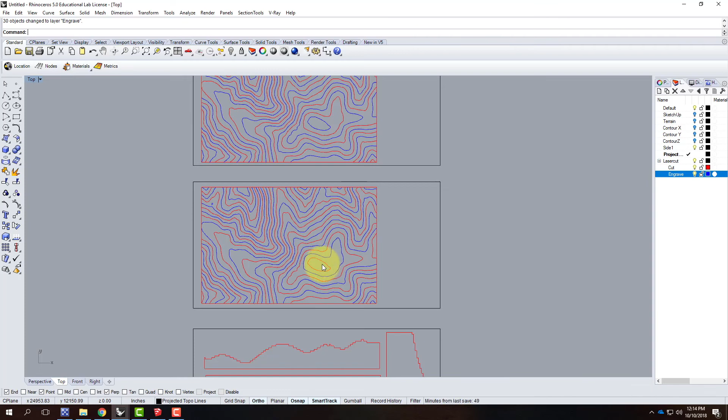So once again, if I compare, I've got this circle and that circle, and they're opposite each other. That's the important thing. So at this point, I have the files almost ready to cut out.

The last piece is that there is a thickness to the cardboard, and so these sides here have some thickness. So unless I miter the corners, one side's going to be a little too big, so I might as well take that off of one of the sides. I'm going to pick the two long sides, there, and take off 5/32 of an inch from either side. If you forget to do it, you can do it afterward with a knife.

It is possible to actually cut with a knife. I know that's a novel concept, but yes, you can take an X-Acto knife and modify this. Actually, the truth is when you put it together, you're going to have to modify it a little bit anyway.

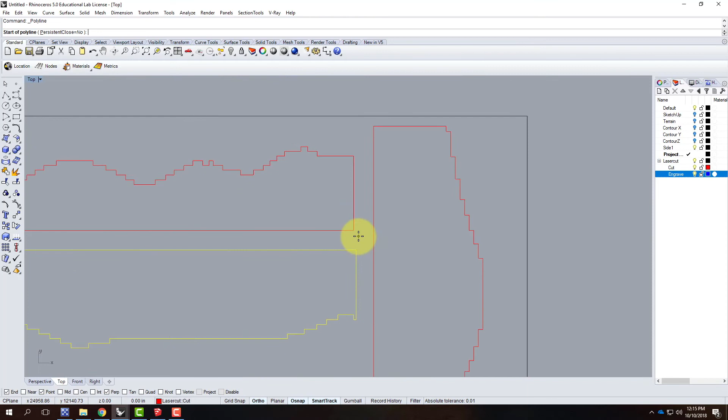So let me start at this corner. I'm going to move myself over by 5/32 of an inch. I'm not using that 39.063 anymore because it's now down to the small scale, so it's 5/32 of an inch. We'll snap perpendicular there. Same thing, we'll go from here over 5/32, and we'll snap to there.

We'll move to the other end, and go over 5/32 of an inch, and go up to there. And we'll start there, go over 5/32 of an inch, and go to right there.

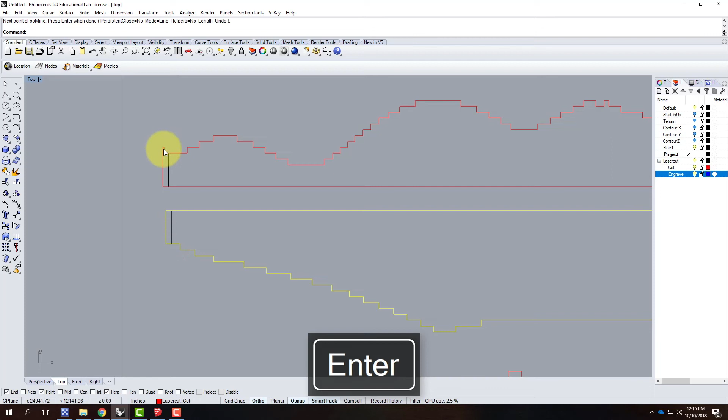Now I recognize I'm cutting off some little steps. The truth is those little steps aren't going to matter anyway because it's too small a piece to worry about. So we'll go ahead and trim.

Let me take these pieces here, these pieces right there, and we'll trim. I'll trim off there and there. I'll trim off there and there. I'll hit enter to finish, and then I can join these back together. So I'll join, and I will join.

And there we go. So the end result is that I have all the pieces necessary to actually build one of these physical models. And that's the important thing to get through today, is I want you to get ready. If you do make it today and you get the AutoCAD file, you're essentially ready with your AutoCAD file to turn in as the digital file part of this assignment.

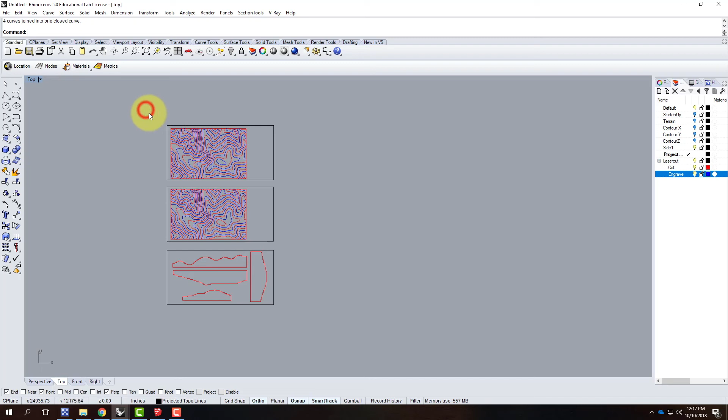I'd have to double check on when that part is due, but it is due before the main part, the Halloween, when the whole actual object is due. So now that I have these two pieces ready, I need to make an AutoCAD file out of them.

I will select them, go to the File menu, and go to Export Selected. From here, I don't want an AutoCAD, or I don't want a Rhino file anymore. I want an AutoCAD DWG. Let me go into my flash drive and choose where to save it.

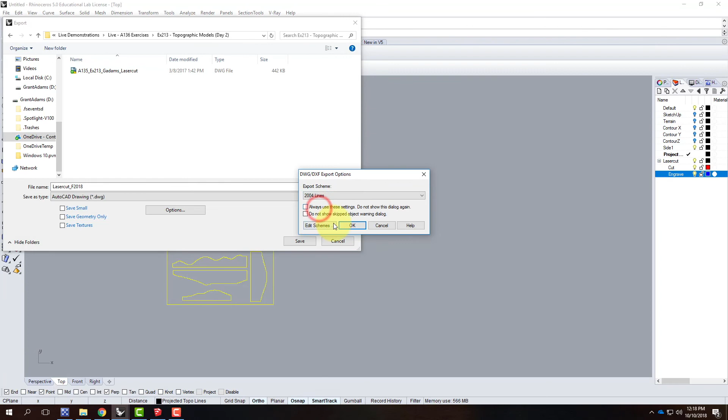All right, so this is going to be my laser cut, and this is the fall of 2018. I can click on Options here. My export scheme, I'm going to use 2004 lines, and I'll go ahead and say OK. Then I'll click Save, confirm 2004 lines, and say OK. It's now made the AutoCAD file for me.

That file is what I'm going to need to bring over to the laser cutter to do the actual cutting. Has anybody in this class never done laser cutting before? It's OK if you haven't, but if you have, I'll assume you know how the laser cutter works. There should be a lab tech this semester to help you. If not, partner up with somebody who knows what they're doing.

That's a good strategy. If that doesn't work, find me during office hours and I'll help you do it. OK, so now that I have that, a couple other quick things about the AutoCAD file. There is one thing you absolutely have to do in AutoCAD, unfortunately. You can do it right before you cut or ahead of time, and obviously it's better if you do it ahead of time so you're absolutely ready to cut.

But let me go open that file that I just saved. There it is, I'll double click to open it up in AutoCAD, and hopefully AutoCAD will actually open. I know they've had issues with it this semester, so fingers crossed. This, by the way, pops up every time you have a Rhino export because it says the AutoCAD file was created not in AutoCAD. You say, yeah, okay, whatever.

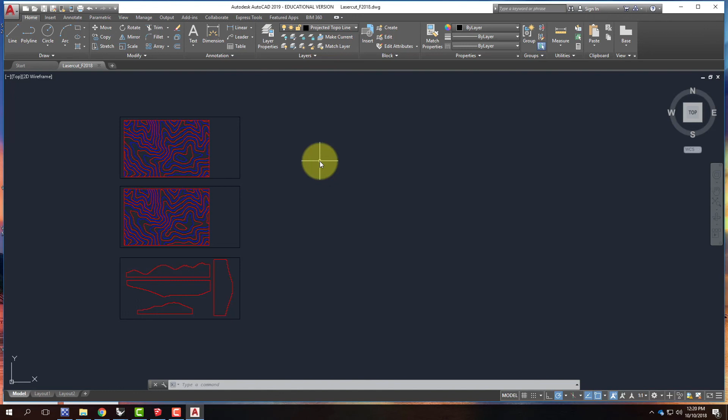At that point I'll save it. I don't know whether the laser cutter computers have 2019 - there may be a version issue. I haven't checked if the laser cutter has 2019 AutoCAD on it. Just be aware you might have to do a save as 2017 or whatever the version is over there. Like I said, I haven't checked it yet, but when I go do this as a test, I'll confirm that it works.

So at that point I'm done, and I have my file ready, and we'll put it together. I will do a live demo for you where I'll actually put it together or show you how to put it together and talk you through that. There is, however, if you're so anxious that you want to get started before I do that demo, on the course website...

Under tutorials, under... where is it? It's under Physical Modeling Topo 6.1. This walks through a lot of the stuff I'm talking about. At the very end, there's me several years ago putting this together. It's actually kind of entertaining because halfway through the glue bottle explodes on me, but it is what it is. So you can see me actually put it together if you're anxious and want to see it before I do the demo for you.

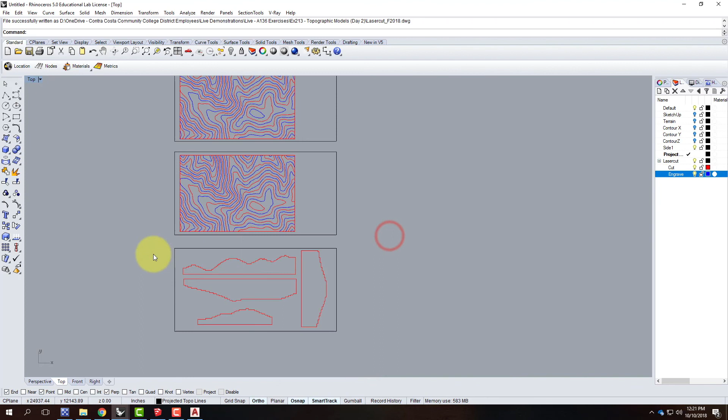I just wanted to point that out, that it's there should you need it. The other thing is, if you get lost on any of the steps, we have lots of practice for you to see there as well. In terms of today, all I'm really looking for is this in a screen capture. So go to your little triangle in the top view, go to Capture to File, give yourself this, give it a name as a JPEG. You can use that as what you post on the course website.

Okay? Are there any questions about it? I know it was a lot to take in. I talked for a long time today, but I tried to get the whole thing in so you can see the whole process. Okay? All right, I'll be around to help you if you have any questions.